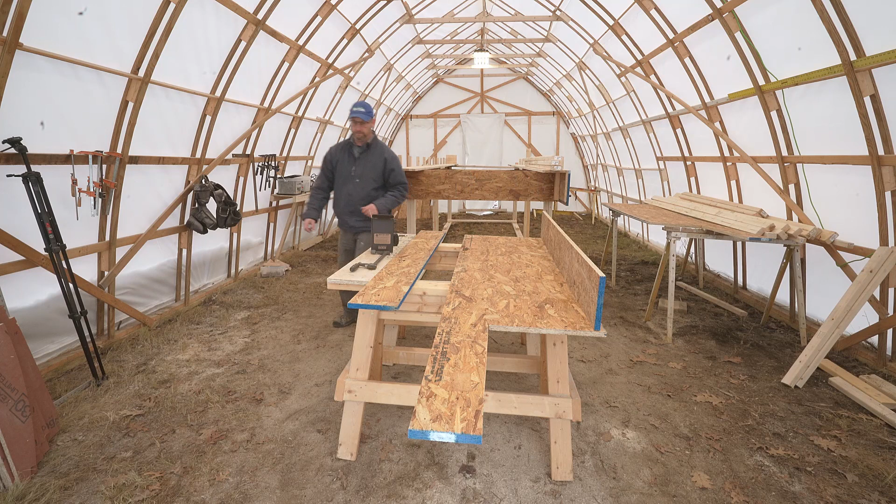Welcome back to the channel. Now that we have the rear section of the Strongback constructed, braced, and leveled with the laser, we can turn our attention to getting this front section built and installed. The construction is fairly similar to what we did on the longer rear section, with the exception of the sides only being a single layer of 3/4 plywood instead of double. The main consideration here is that the whole Strongback has to narrow down quite a bit in order to accommodate the molds when they get installed.

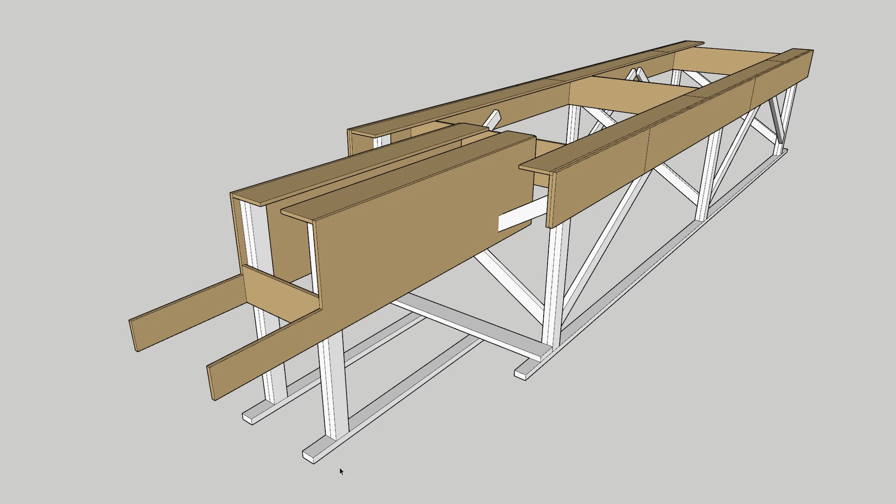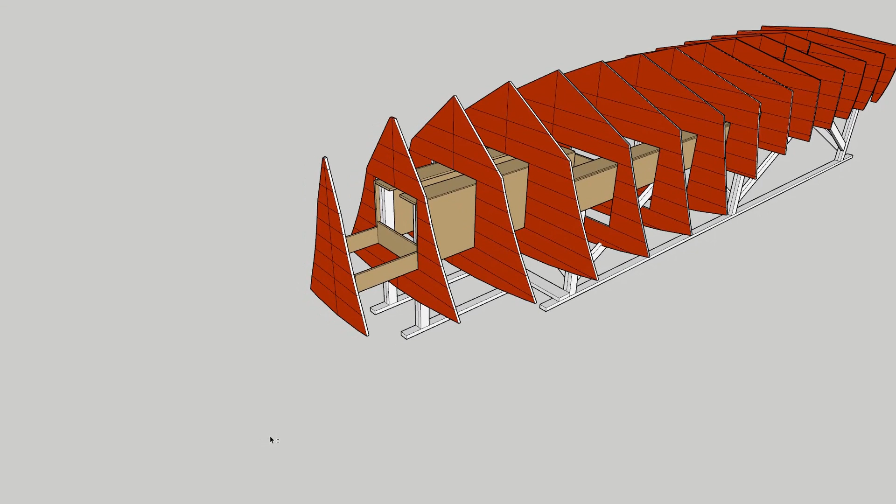We'll zoom out here and take a look. Really the only problem left to solve is exactly how I'm going to wind up mounting this last forward mold. For now I'm just going to satisfy myself with putting that first mold on using these 2 plywood fingers that come off the front section, and then revisit the final bracing and positioning for this first station once the stem is installed, as it's going to wind up overlapping the first 2 stations anyway, and also requiring some of its own bracing down low.

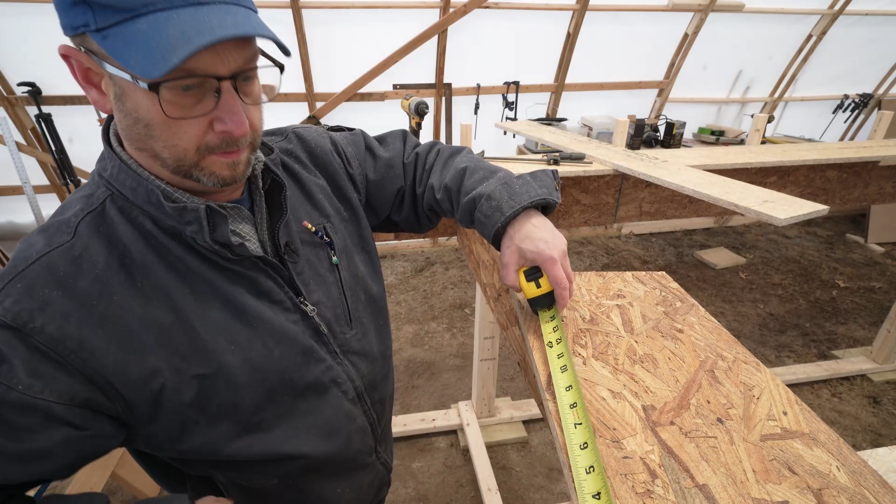I know so far I haven't really said much about myself in this video series, so this little task at hand gives a good opportunity for me to explain a little bit of where I've come from and what my approach is to building things. I have almost 30 years in residential construction and cabinet manufacturing, and during that time I've developed a very strong preference for using templates and tick sticks and pretty much whatever I can in order to keep the tape measure in the pocket. So this is a really good example right here.

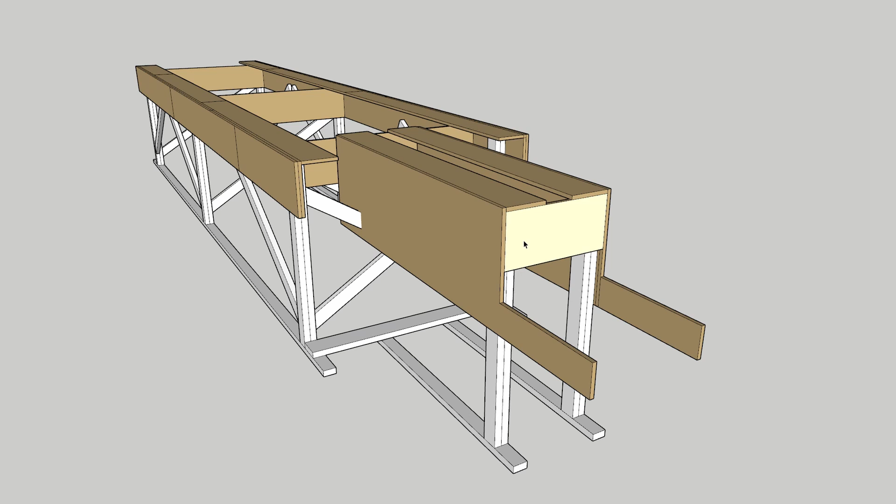I'm using this very frontmost piece of plywood that's going to go on the Strongback, and I'm using it back here at this last cross brace to lay out the lines separating the cleats that I'm going to use to hold the front section on.

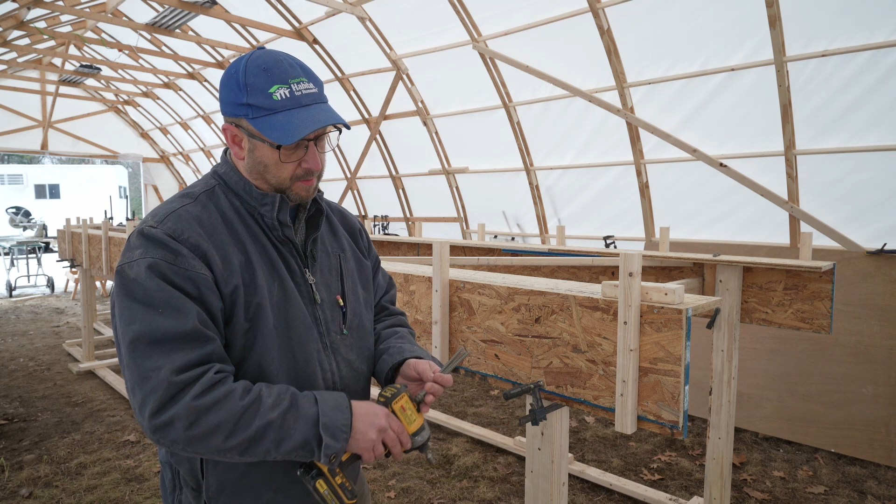In case any of you have been cringing out there watching me use 3-inch construction screws to put these legs on, I'm going to let you know right now that's a temporary thing. Before all the weight of the forms goes on, I'm going to replace at each location with 3 of these. These are 5-inch by 1/4 inch engineered screws that have the same weight capacity as a 3/8 lag bolt, so there shouldn't be any problem with this moving forward. And if you're anything like me, you can stop yelling at the television and making your wife wonder if you're nuts.

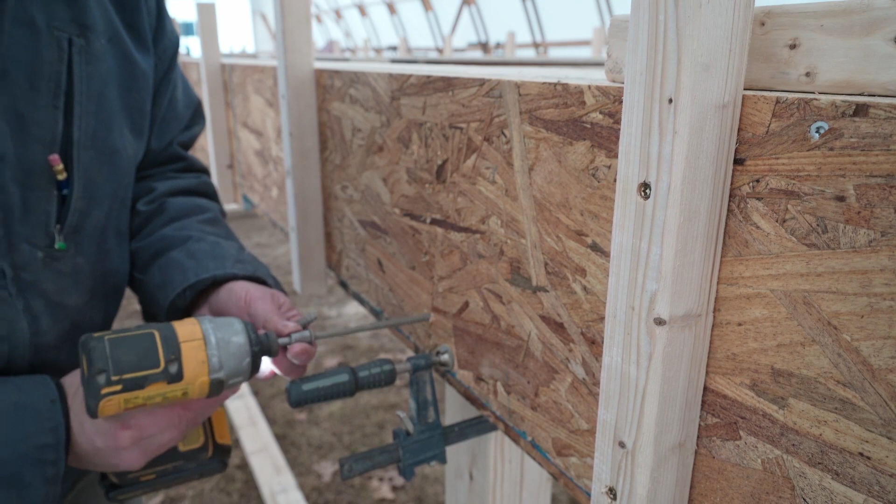Now that the front section's been joined on and the legs have been screwed on with adequate fasteners, and the front section leveled in the same plane with the previous three leg sets, it's time to turn my attention to straightening everything from side to side.

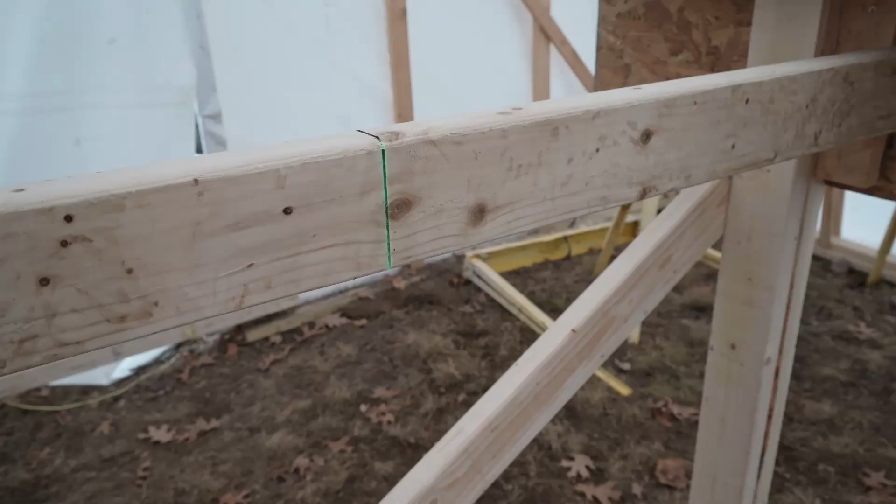The way I'm going to approach that is I'm going to treat the front leg set and the rear leg set as fixed points, and I've installed diagonal bracing at both ends. Then I marked a center line at each of the four leg sets, and I'm going to take this laser and with a series of clamps and maybe a little leverage, pull the second and third leg sets into place.

I'd call this a strong start. This is at the second section of legs moving aftward. All I did was turn the laser up and align it with both the foremost and aftmost center line marks. I'm going to call this good and go ahead and lock that in, then move back towards the next leg set.

Here I am at the third leg set. That amount that we're off right there is probably less than an eighth of an inch, and in the great scheme of things that's not going to matter at all, as the forms will get straightened up independently using the laser.

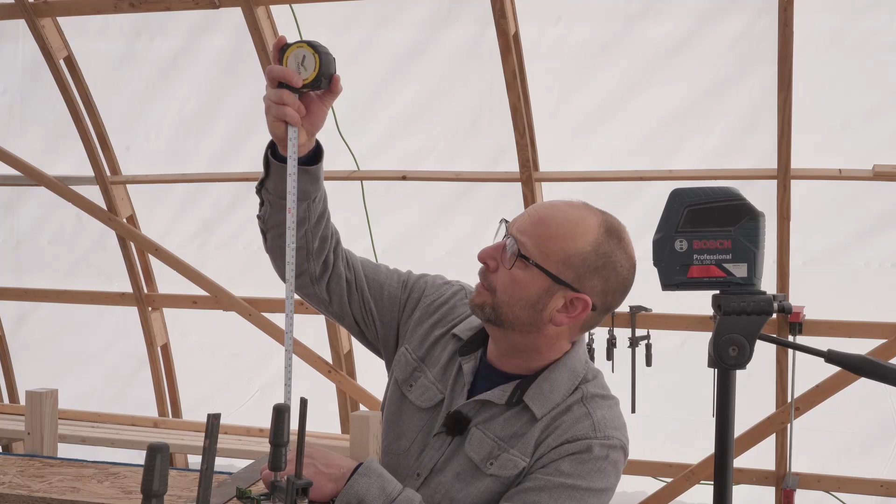All right, now time for the moment of truth. The first mold goes up.

Although it's nice having the sun just to make the whole boat shed cheery, it's making it a little bit difficult to see the laser, so I'm just going with these white stickers, and the green lines popping out okay for me. I don't know if that's going to show up very well on video, but it's clear enough for me here for these purposes.

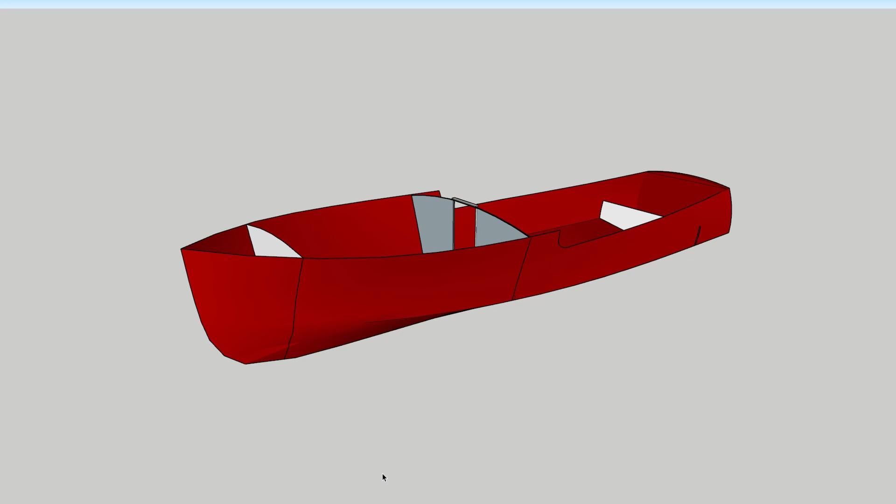For those of you watching that might be familiar with the design, I do want to point out that the two bulkheads you can see here in the SketchUp model, this forward one and the one that separates the pilot house from the cabin, were intended by Doug Hylan to be installed in lieu of two of the station molds. However, the way I've laid out the Strongback makes that not really possible to accomplish, because the Strongback stringers would run right through the middle of the bulkheads.

I don't anticipate this is going to be a problem though, because once the hull's turned over, I can take some template plywood and some tick sticks and transfer the shape of the bulkheads exactly how I want them, and should be able to create those with a minimum of fuss.

Well, there it is in all of its glory. It's wonderful to be able to finally see the shape of the hull and get an idea of the scale and size and general awesomeness of this design.

That's going to do it for this episode. For the next one, we're going to start actually installing some boat parts, with the motor transom going in and a few more plywood pieces in the aft end, and then the transom's going to go on. From this point forward, it won't be fourteen times for the same thing over and over again, as we're actually going to start building a boat.